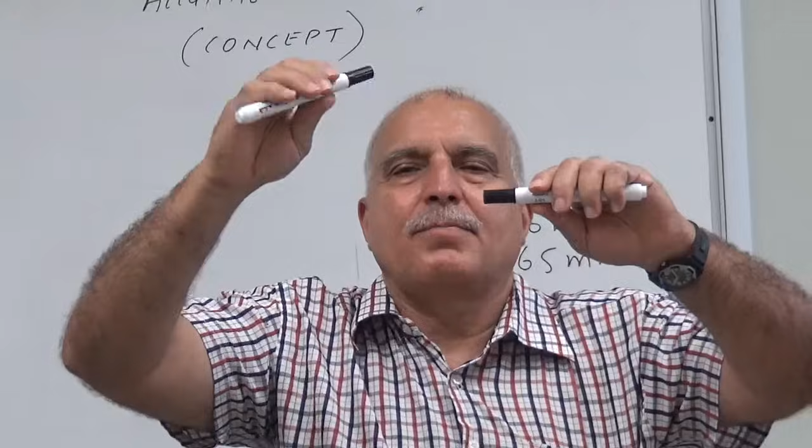For example, this is the motor, movable, this is pump, and it has got offset misalignment and angular misalignment. In this case there is offset and angular misalignment. So we have to make alignment in the vertical direction, and after that we have to make alignment in the horizontal direction. The formula which we use is the same for aligning in the vertical direction and for aligning in the horizontal direction.

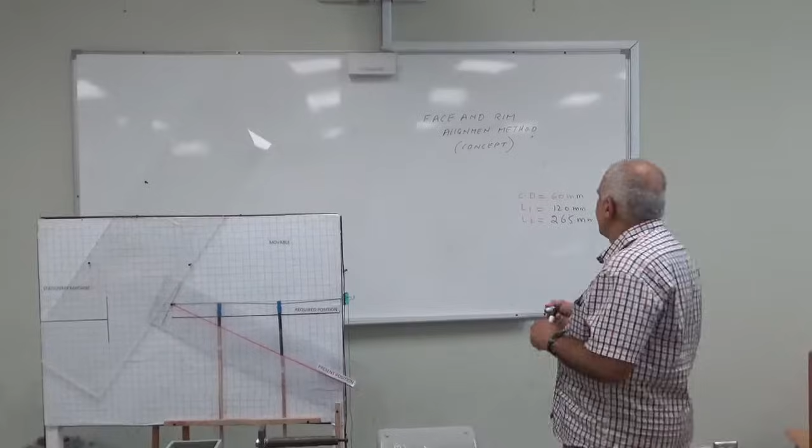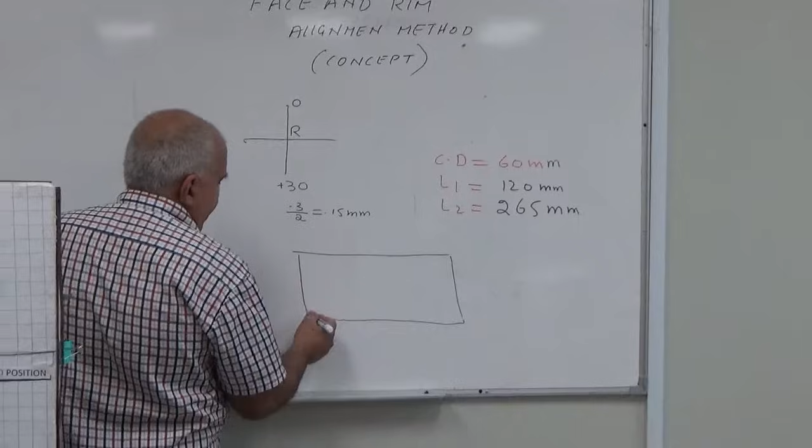The formula is the same, and as we know, for offset misalignment we divide the total reading. For example, on the top it is 0 and on the bottom it is 30 plus 30, so it means 0.3 millimeter. So 0.3 divided by 2 is equal to 0.15 millimeter. So we will add, for example, if we are aligning in the vertical direction, this is for the front side bolt, this is for the back side bolt. The shims which are to be added or removed. This is for radial, this is for angular. So for radial it will be plus 0.15 millimeter here and plus 0.15 millimeter.

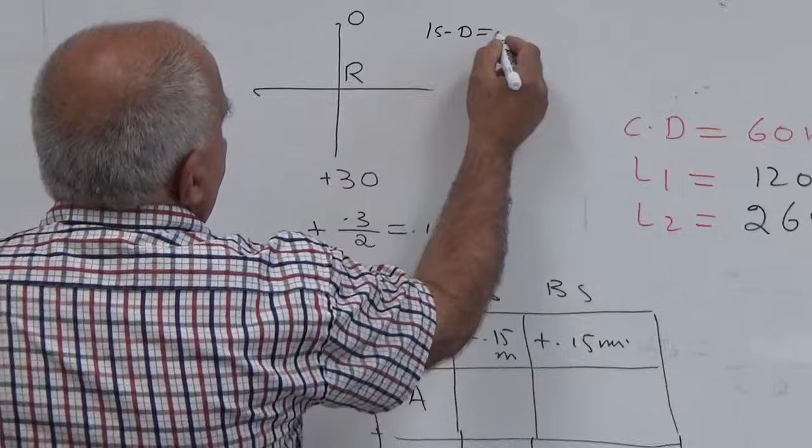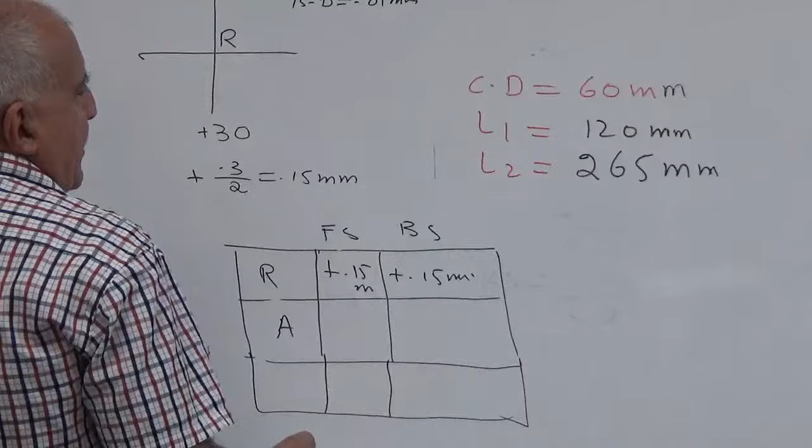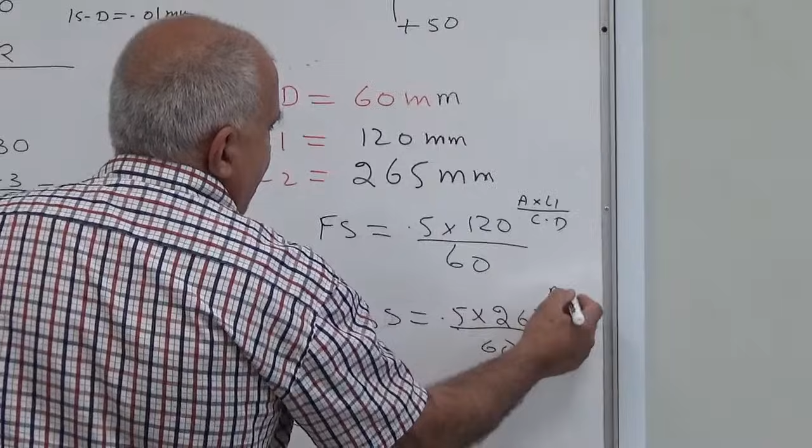This is for offset, and on your dial indicator one small division is equal to 0.01 millimeter. So since this is the dial indicator reading, it means 0.3 millimeter. For offset we will divide by 2. And for angular, as I have told you, we take 3 dimensions: coupling diameter, L1 and L2. For the forward side, for example, the angular reading is plus 50, so we will change it into millimeter, 0.5 into 120 over 60. And for the back side, it will be 0.5 into 265 divided by 60. The formula is A into L1 over coupling diameter, and here the formula is A into L2 over coupling diameter.

You know A is the angular reading, and L1 is the distance from the coupling face where you are taking the reading from the dial indicator on the face to the front side center bolt, that is L1. L2 is the distance from the coupling face where you are taking the angular reading to the center of the back side bolt.

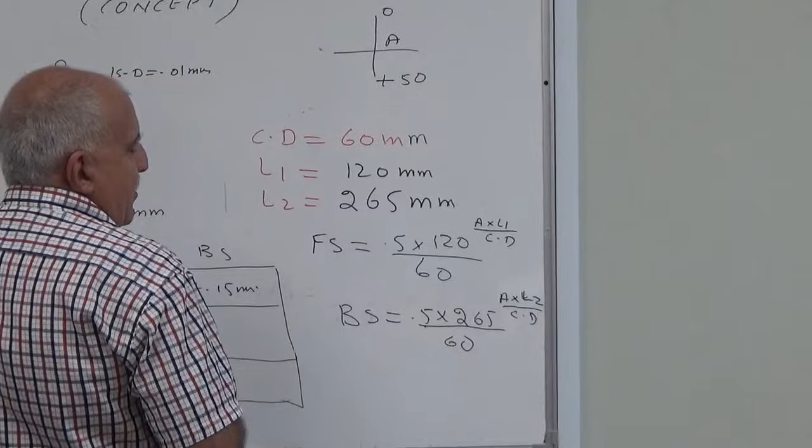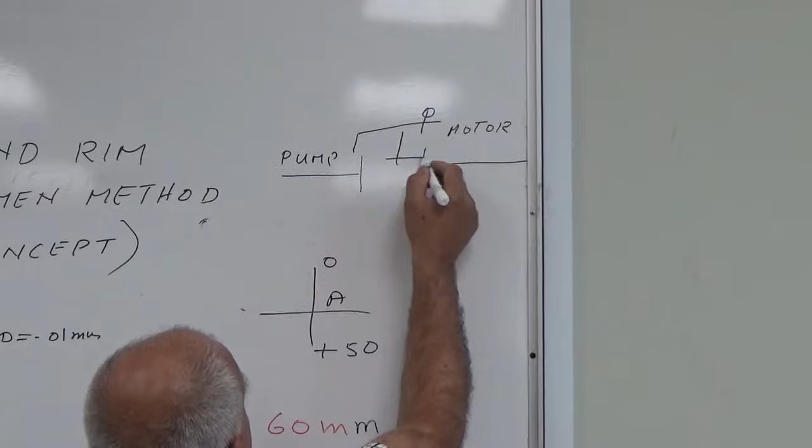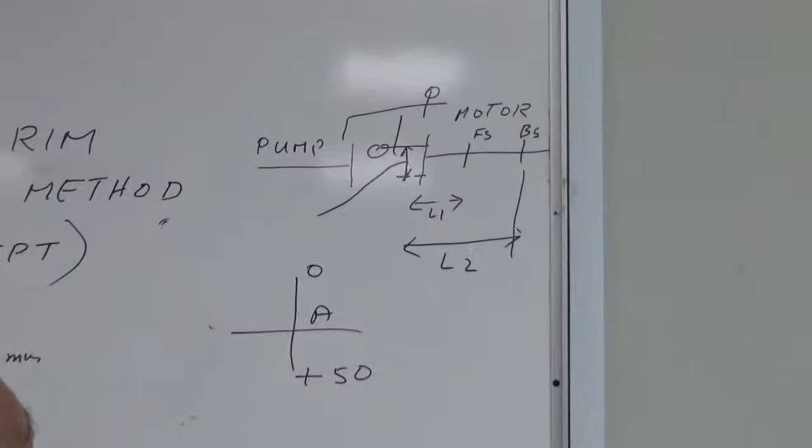So I can show you here. For example, this is the motor and this is the pump, and you are taking the reading here. This is the front bolt center and this is the back bolt center. So this will be L1 and this will be L2. And the diameter of the circle on which this dial indicator is rotating will be called the coupling diameter. It is not exactly the coupling diameter, but we will call it coupling diameter.

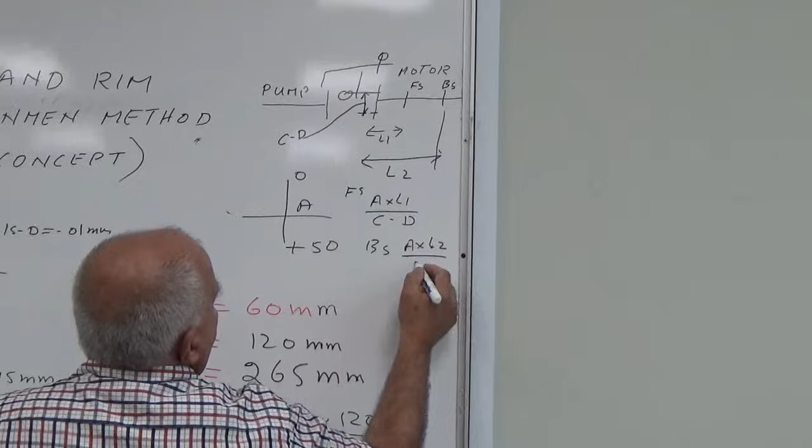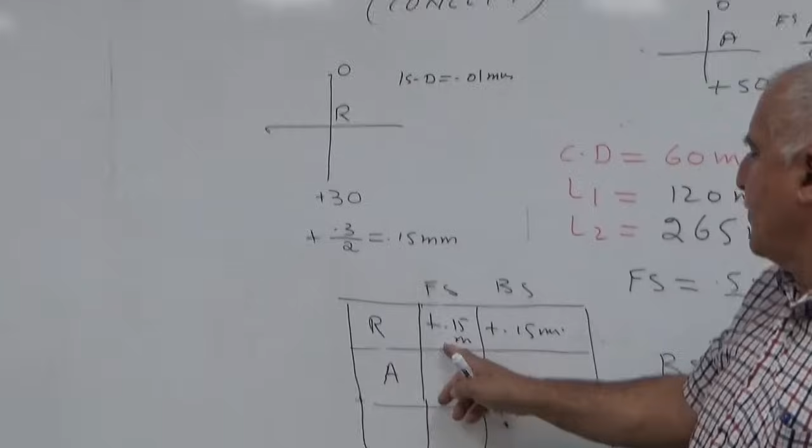And for shims on the front side, the formula is angular reading into L1 over coupling diameter, and for the back side, A into L2 over coupling diameter. So these are the shims which you will add or remove for angular alignment. These two formulas: if it is minus, you will remove; if it is plus, you will add. And this was for the offset misalignment. Whatever answer you get here, you will write on the front side and the back side. It will be the same, not different. But for angular reading, this will be different and this will be different. And then you will add the total.

Okay, now I will come to the machine and start. I have already done this alignment in the vertical direction. Now I will do alignment in the horizontal direction. When you do alignment in the vertical direction, you make soft foot correction. After that you make rough alignment, and after rough alignment you do precise alignment with the dial indicator. Now we have finished the alignment in the vertical direction. Now I will do it for the horizontal direction. Horizontal direction means this or this, like this.

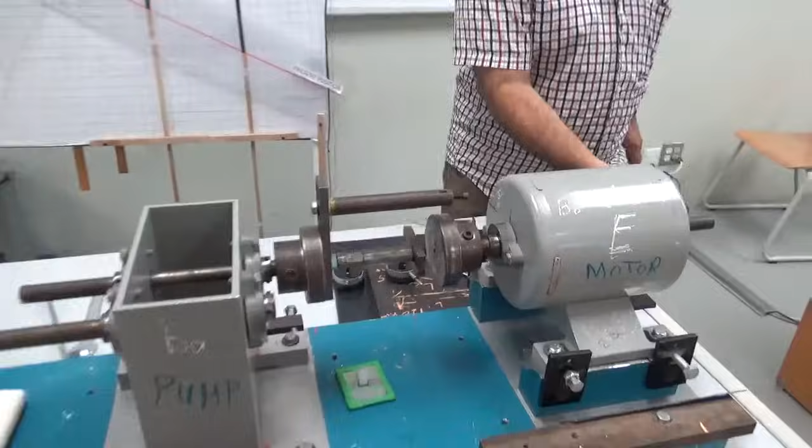Okay, I will now loosen the foundation bolts. These are the foundation bolts. I will loosen them so I can move this in the horizontal direction. I cannot move this. And these are the jacking bolts. You can see here, these are the jacking bolts. These are used to push the motor to the opposite side. These are to be used to move the motor to the opposite side only when these foundation bolts are loose. These are the forward support bolts, and these are the backward side bolts. Again you can see here, this one here.

Now what I will do, I will remove this a little away and make rough alignment in the horizontal direction. So this is, I am making alignment in the horizontal direction.

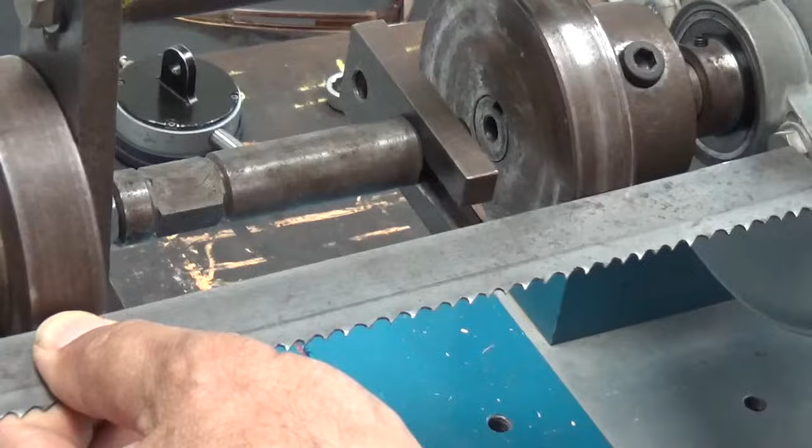Okay, so this is alignment, there is no gap here, so I will just touch these jacking bolts. Now I can move from these jacking bolts forward or back side. Now this is almost rough aligned. There is no gap here, so I will just touch the jacking bolts. These are the jacking bolts. I am touching it so that the position is not changed.

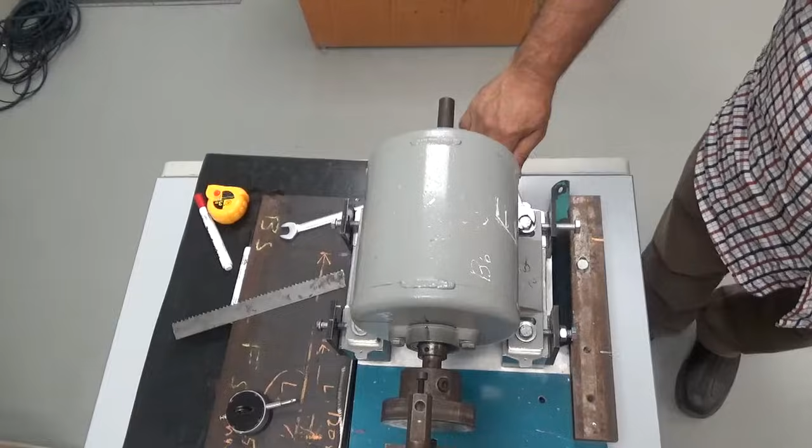Now I will tighten these motor foundation bolts, but when I tighten them, I will tighten them in 3 steps or in 3 rounds. So this is my first round. It is always a crisscross pattern. This is called the crisscross pattern of tightening. So I am tightening it now. This was my first round. Now second round. Okay. Now third round. Okay.

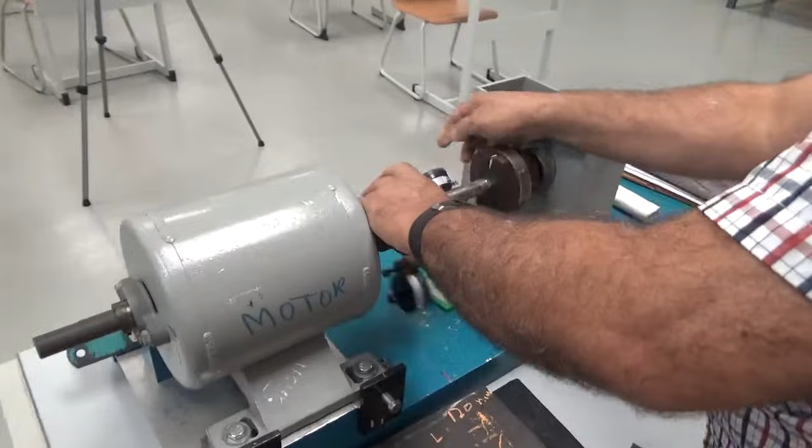Okay, now I will take the reading. I will fix this, this is fixed on the rim side, and this is fixed on the angular side. Okay, so after this I will take dimensions L1, L2 and coupling diameter. I will start with the coupling diameter. Coupling diameter, L1 and L2 are necessary for angular alignment, and the reading which I take on the rim side is for offset alignment correction.

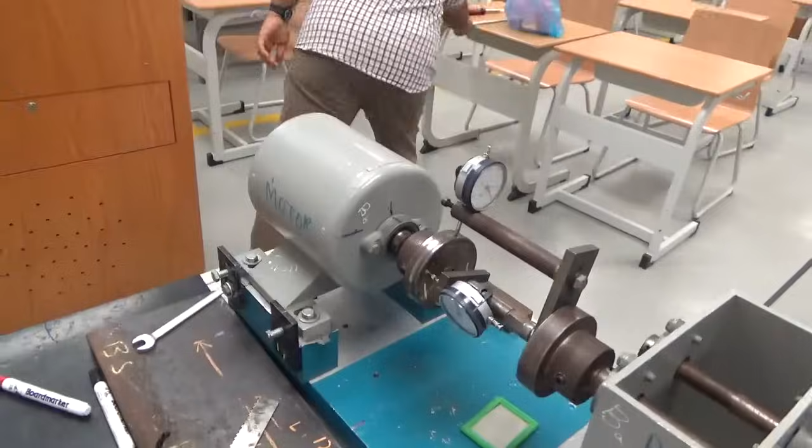Now I will take the coupling diameter. This needle is touching here, I will make a mark here. Okay, this needle mark here. Now I will come to the opposite side and make a mark here. So these are the two marks, and now I will take the measurement here. It is about 60 millimeter. So coupling diameter I have already written, 60 millimeter.

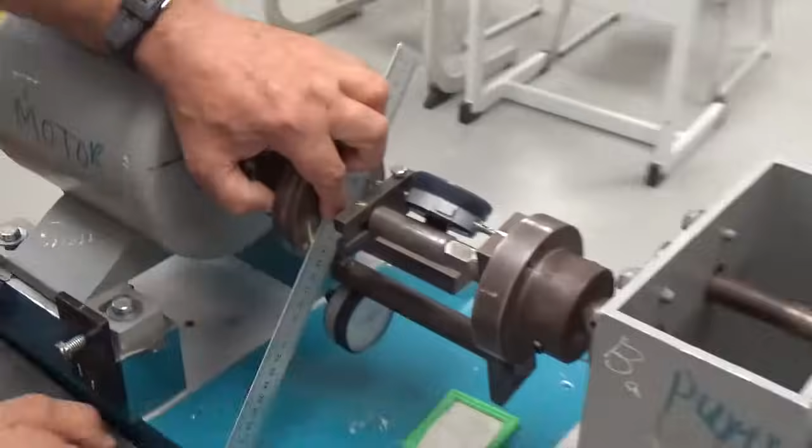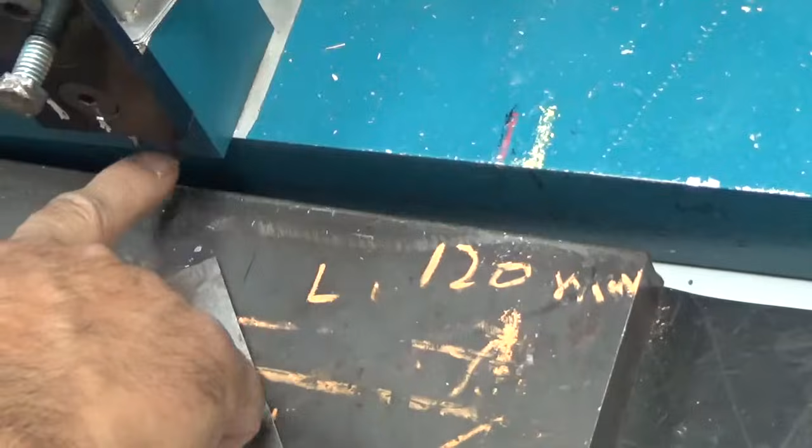After this I will take the measurement from this face to the center of the front side bolt, from here to here. I will make a mark here. From here to here, this one is about 100. You can take the reading and it can be different at different times. Now from here to here it is 120 millimeter, and from here to the center of this bolt is about 265. L1 was 120 millimeter, and L2 is 265 millimeter. Okay, this I have already written here.

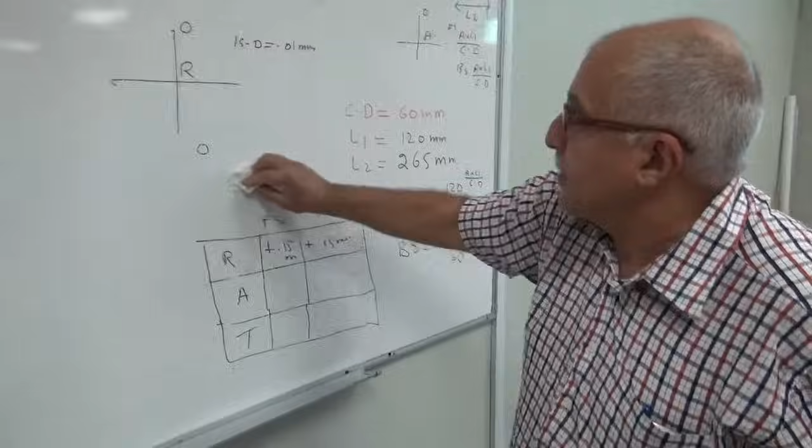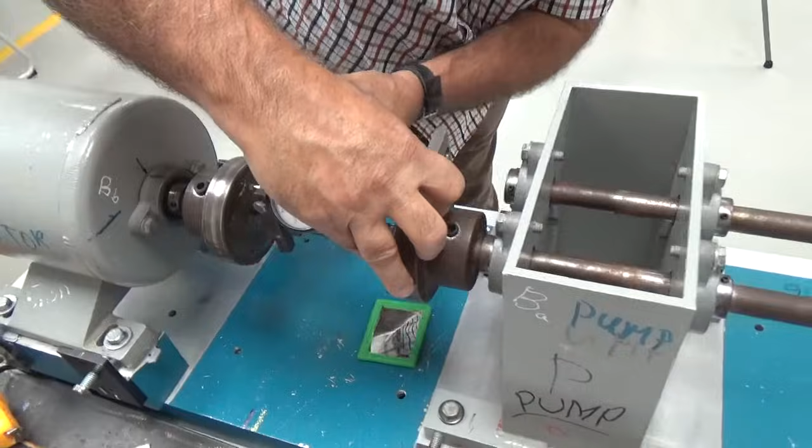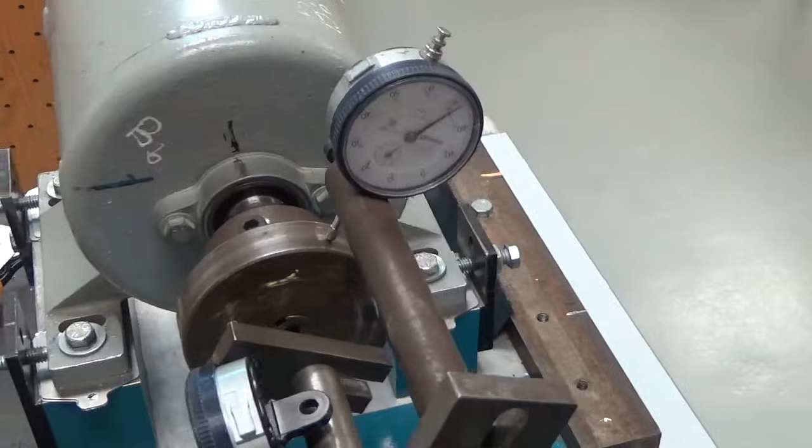Okay, after this, now I will take the readings. I will start from this. I will take the rim reading and I will make it 0 here. This is 0 here, and I will go to the opposite side and take the reading. This is 100, 200, 300, and it is 322. I will recheck it. Okay, here it is 0. So I go to the opposite side. This is 100, 200, 300, 322 plus 322 dial indicator reading. So I will write it here. Dial indicator reading here is plus 322.

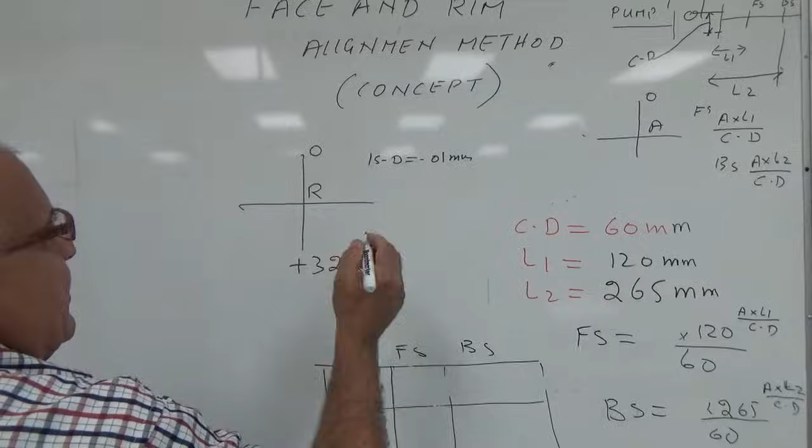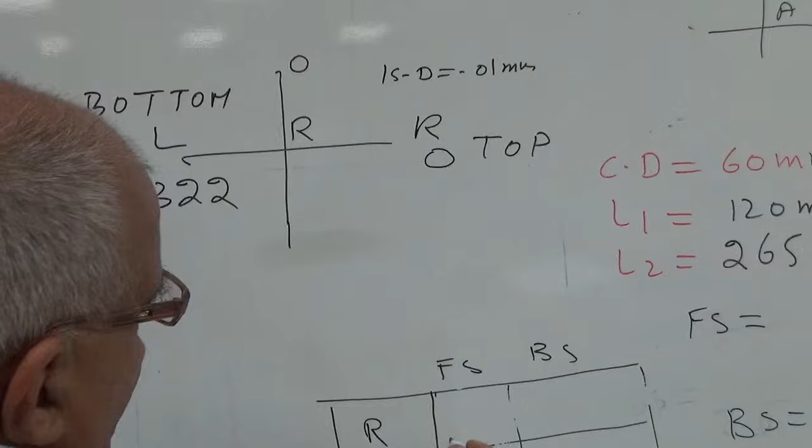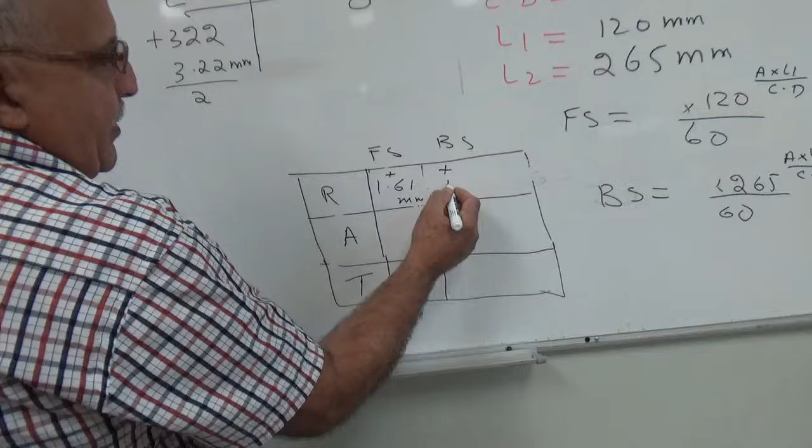I can write here also, this is left side, this is right side, because this is horizontal. So this side is 0, and this side is plus 322, because I am doing it on the horizontal side. So this is top and this is bottom, but it is in the horizontal direction. So 322 I will divide by 2. This becomes 3.22 millimeter, because one small division is equal to 0.01 millimeter. Then I will divide this by 2. So this will become plus 1.61 millimeter. Okay, so 1.61 millimeter is for the front side in the horizontal direction.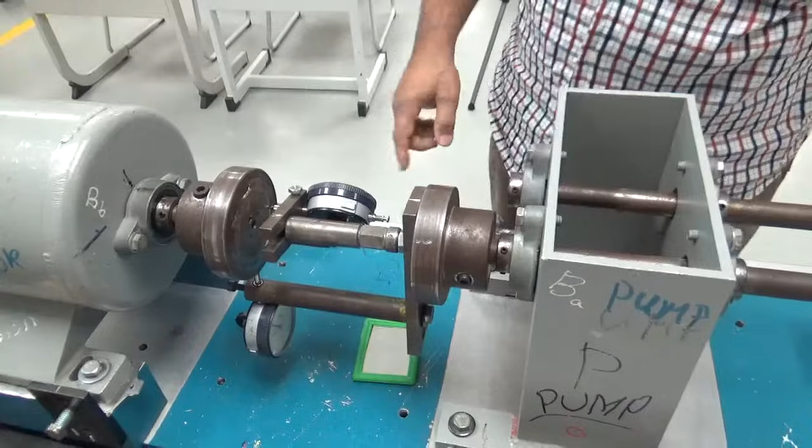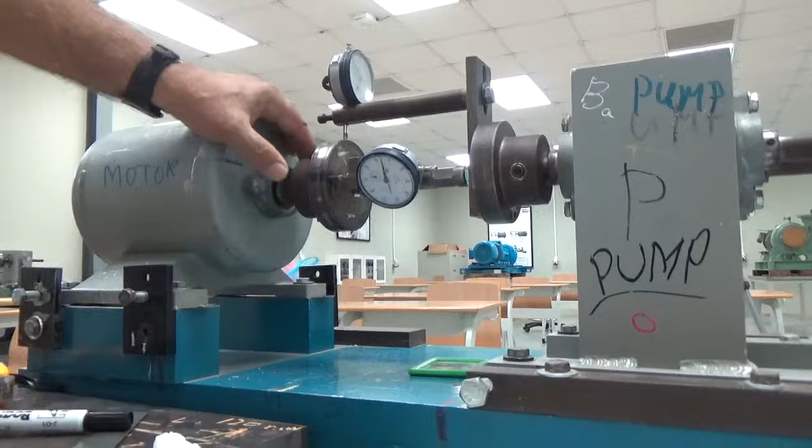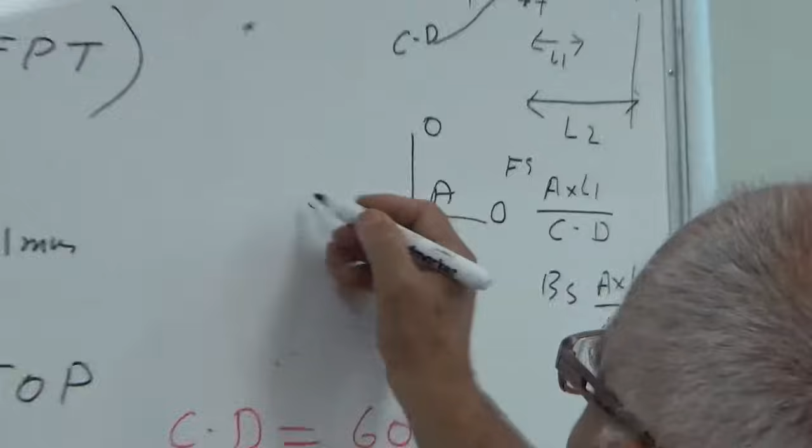Now I will take the reading for angular. Okay, this is 0 here. This side you can see here, this one is 0. Now I will go to the opposite side and see what is the reading there. The reading here is minus 5. So the angular reading is minus 5. I check it again. So it is almost minus 5 or minus 6. Okay. So I will write here, angular reading is minus 5.

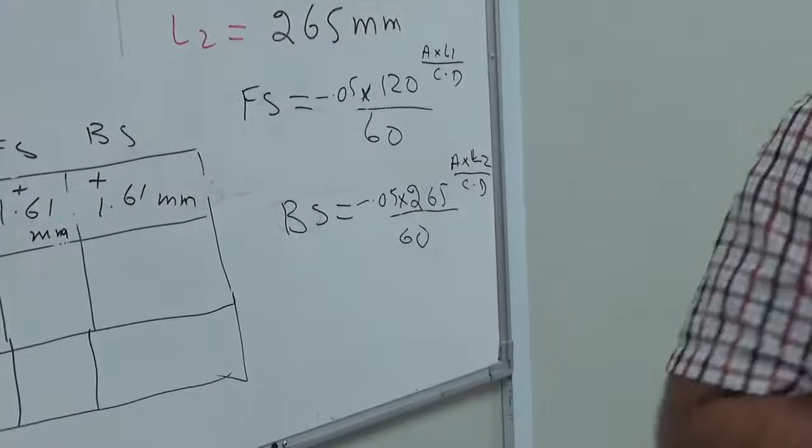Now I will measure the angular alignment correction for front side and for back side. So this will become minus 0.05 millimeter. So minus 0.05 here and minus 0.05 here on the back side. So these shims will be the correction for angular alignment for front side and back side. So what is the answer? 0.05 into 120 divided by 60. Since it is minus, this is minus 0.1 millimeter. So I will write here minus 0.1 millimeter.

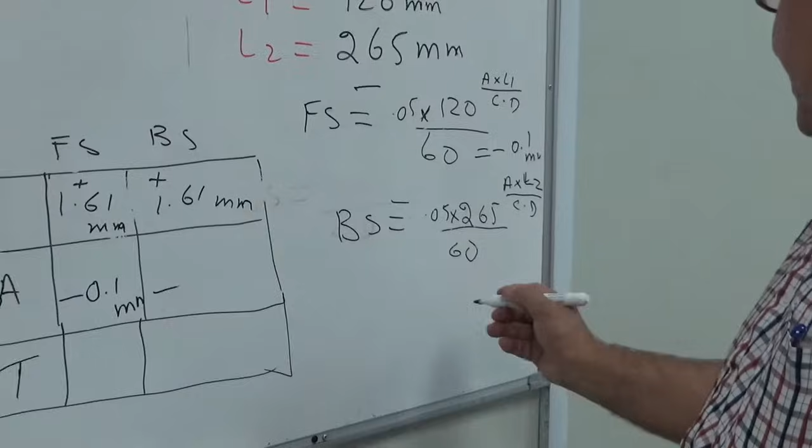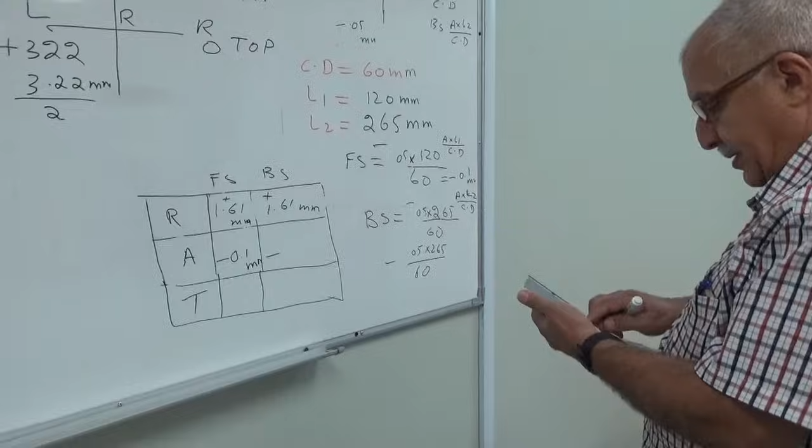And what will be this? This is minus 0.05 into 265 over 60. Minus 0.05 into 265 divided by 60 is equal to minus 0.22 millimeter. So here it is minus 0.22 millimeter. Now the total will be 1.51 millimeter plus for the front side, and for the back side plus 1.

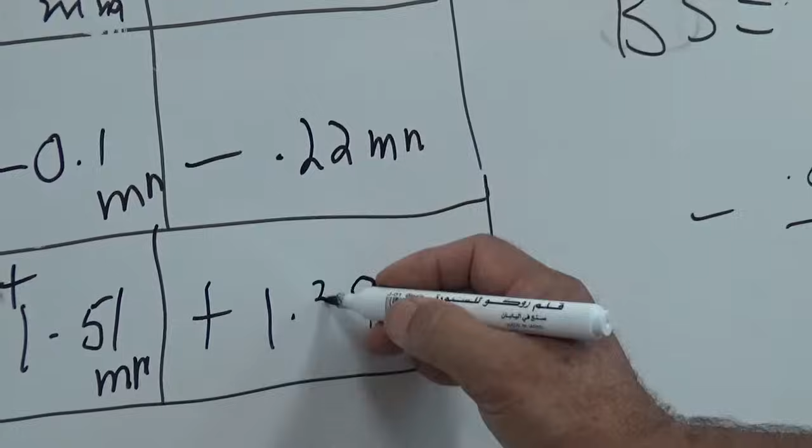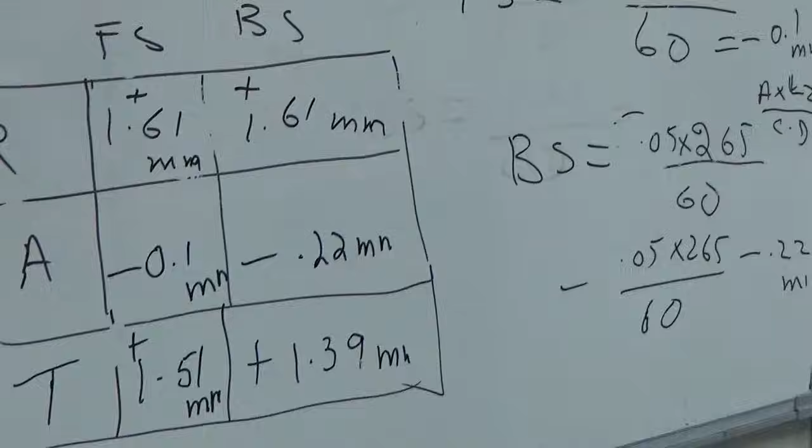So 1.39 millimeter for the back side. Okay, so these are the shims which I have to add on the front side and on the back side. 1.51 for the front side and 1.39 on the back side. It is in plus, which means that now right side was 0.

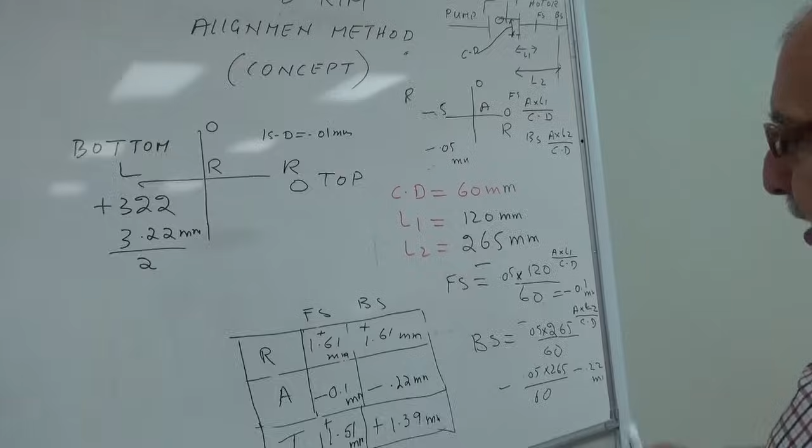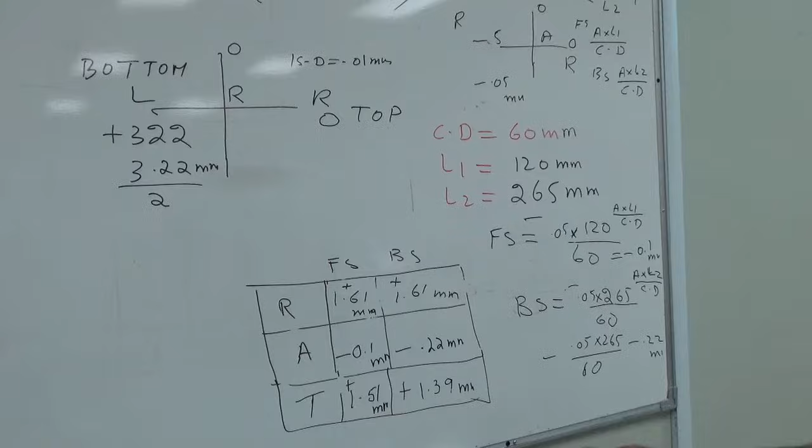This was our top, this was our bottom. So from the bottom we have to add, as per vertical alignment procedure, when we get plus reading in the bottom, we have to add the shims. But here we don't have to add the shims. We have to push from the right side. This is the right side and this is left side.

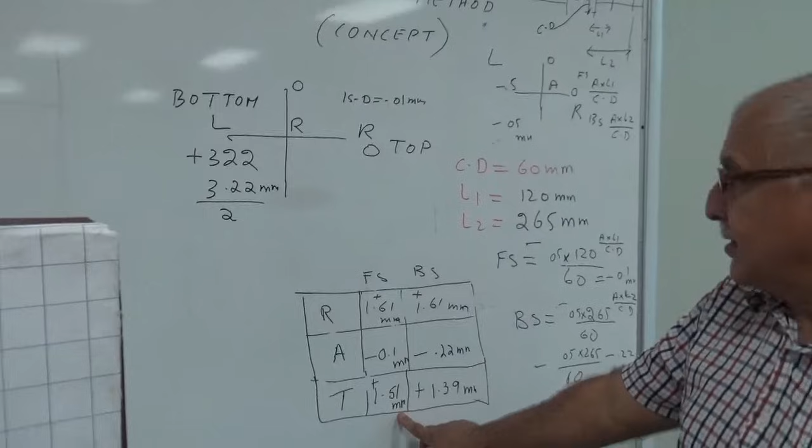So we will push from the left side to the right side, because this is 0, and here we are getting plus answer, plus 1.51 and plus 1.39. So from the front side, we will push 1.51 millimeter from left to right, and same is here at back side. From the center of back side, we will push from left side to right side. How much? 1.39 millimeter.

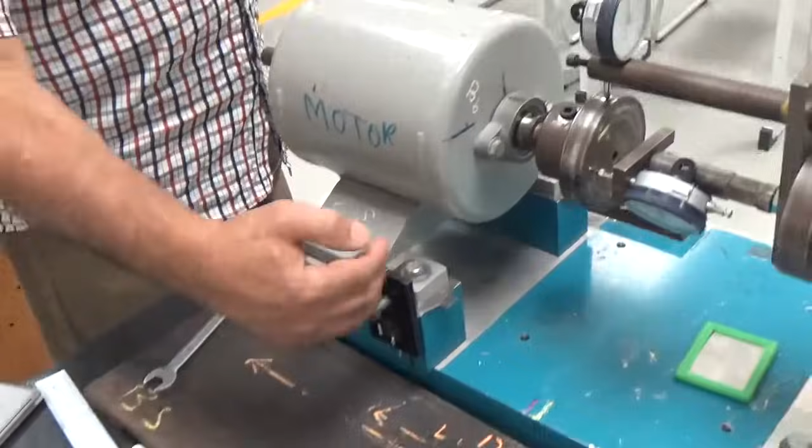Okay, now let us do it. How we can do it? First we will make sure that these jacking bolts are touching the motor foundation bolt. Okay, after this, we will make a gap on the right side, because we have to push. This was 0 here and this is our bottom, and we are getting plus. We have to push it from this side. 1.51 millimeter we have to push from this side, and 1.39 millimeter we have to push from the back side.

Okay, so we will make a gap, because we are going to push from front side and back side. There should be gap on the opposite side. So on the back side, the gap should be 1.39 millimeter. Okay, so we will make a gap here on the back side, 1.39 millimeter. Here the gap is 1.39 millimeter, and on the front side the gap should be

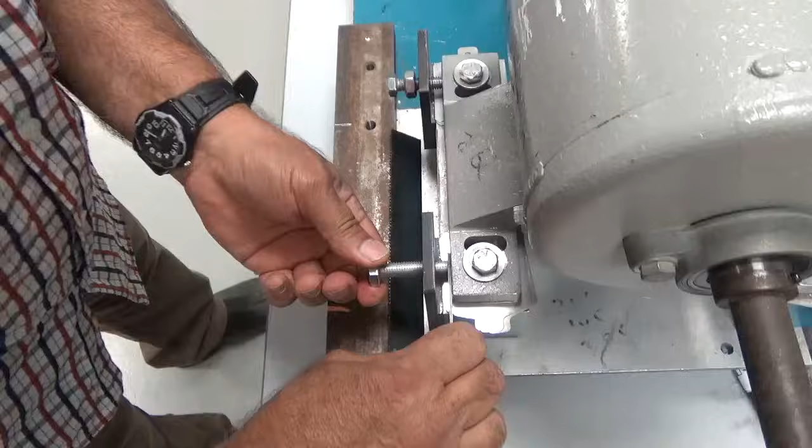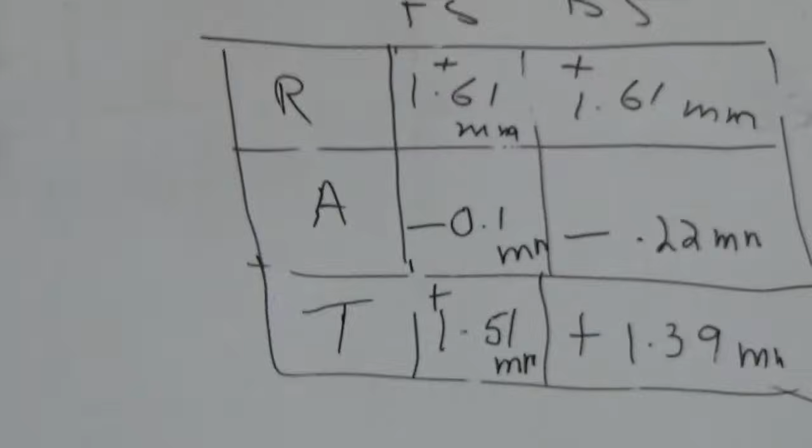Okay, again I will check it. This should be 1.39. I'm sorry, this is more. Again I will. Okay, this is 1.39 millimeter on the back side, and on the front side it is 1.51 millimeter. So you can see there in the chart, front side you have to push 1.51 millimeter, and back side you have to push 1.39 millimeter.

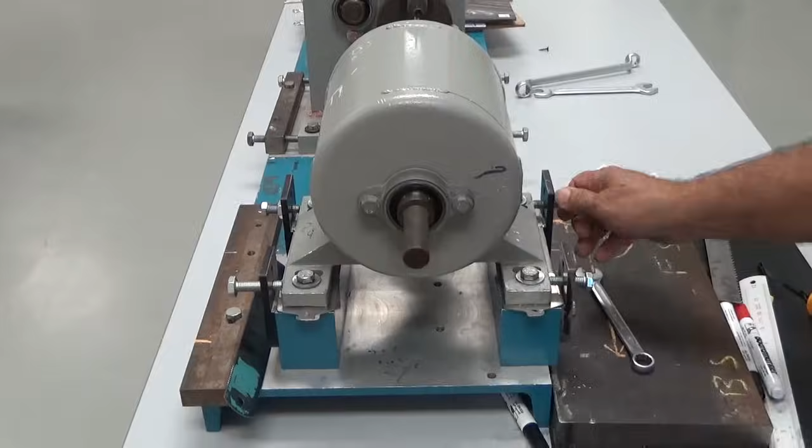Okay, after this what I will do is that I will loosen these bolts, because I have to push it, so this should be loose. Okay, so these are loose, and now I will push from the left side. Okay, I have already pushed it. Now I will take the reading.

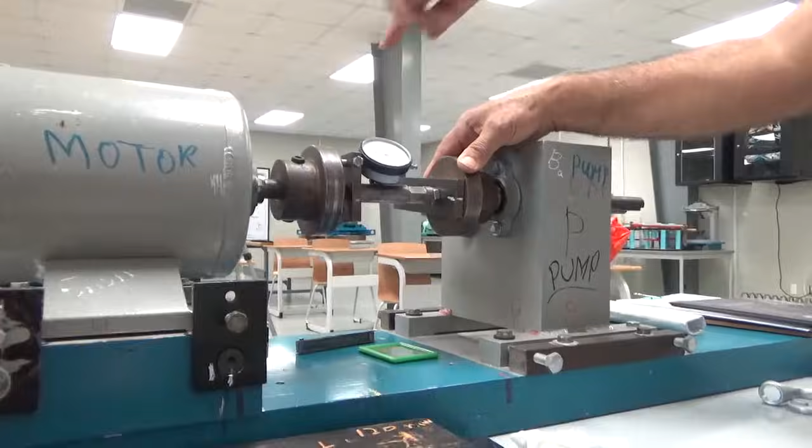Okay, now you can see here there is no gap on this side, and I just pushed these jack bolts by hand because this is a small motor. Now I will just make this a little tight, and then I will take the reading. If the readings are okay, then I will tighten them fully. Okay, so let us now check the reading. This is 0 here, this reading is 0 again here.

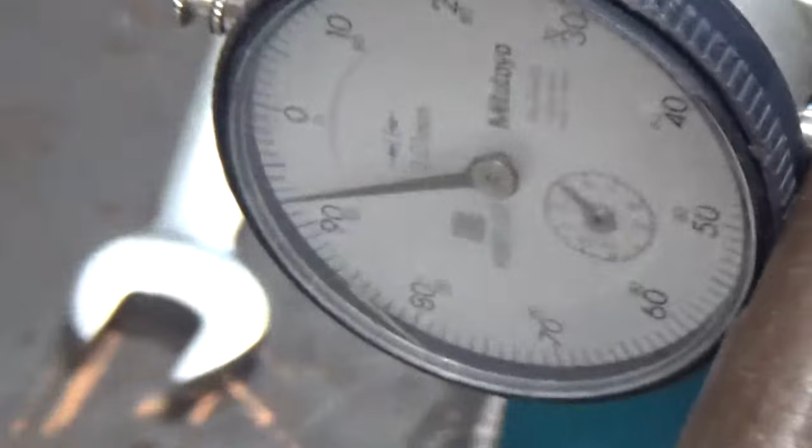And I will come to here. This is minus 100, minus 200, and minus 208. So actually you can see here why our reading is coming wrong, because we have not tightened it here fully. There is a gap here. There is a gap here. So you should be very careful. We will again make sure that we push the motor correctly. You can see here, that's why our result is not coming good.

You can see here, there is a gap here. Now I have tightened it fully. Okay, so I will now tighten it again, because my reading was not coming good. So we have to be very careful. We have to check if we have pushed the motor to the required position or not. Now I will take the reading again after this. So I am tightening it again, then I will tighten it fully next time.

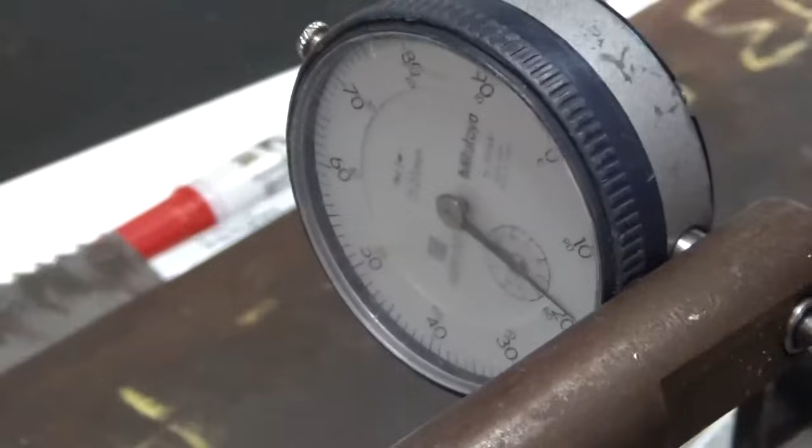After I know my readings are okay, I will take it now 0 here, and I will come to the opposite side, and now I am getting here the reading plus 80. Again I come to this position, this is 0, and I go to the opposite side, and my reading is plus 80. So I will write this new reading now. It's better than before, but still it is not okay. So I will write here plus 80, and now you will see what is the angular reading. Okay, so angular reading, I will make it 0 again, and I will come to the opposite side.

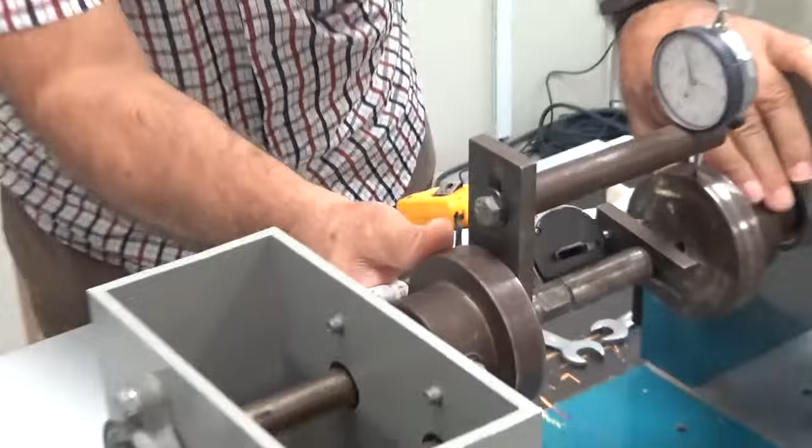The opposite side, the reading is 0. So I don't need to make correction for the angular. The angular reading is okay. Only the radial reading. How do you take the angular reading? Can you show us again? Because these are both almost 0. Yes, okay, you want to see it again? See here, this is 0.

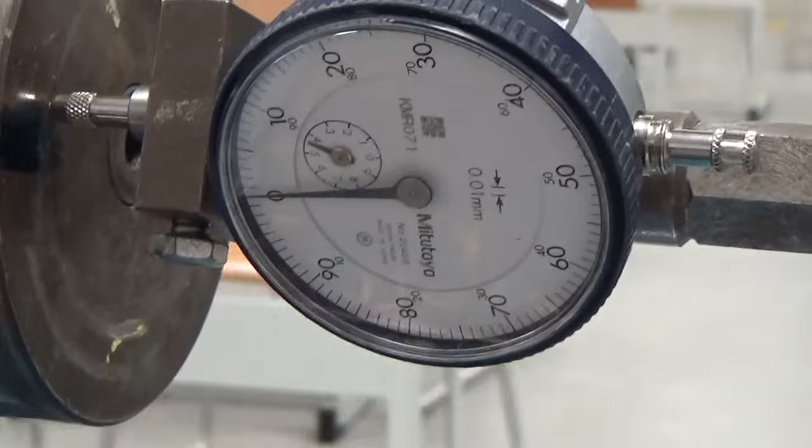Okay, I will make it 0 if it is almost 0. Now I will come to the opposite side. You can see here, come from this side, and you can see here, it is almost 0. Okay, so we have got plus 80 only here. So plus 80 means divide by 2, plus 40 or 0.4 millimeter. So this is plus 0.4 millimeter.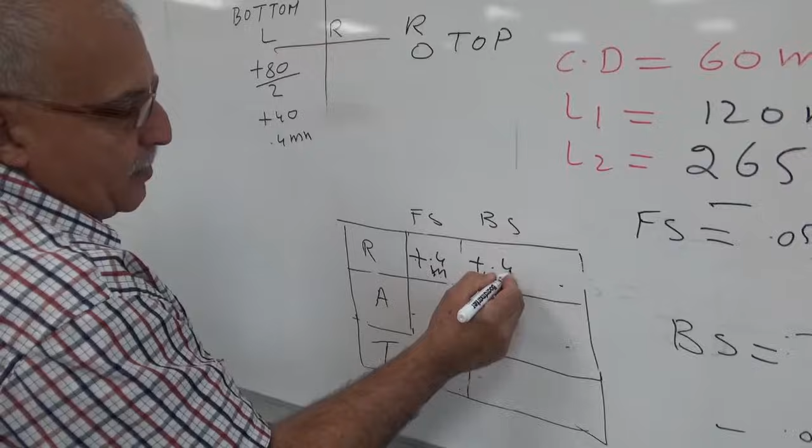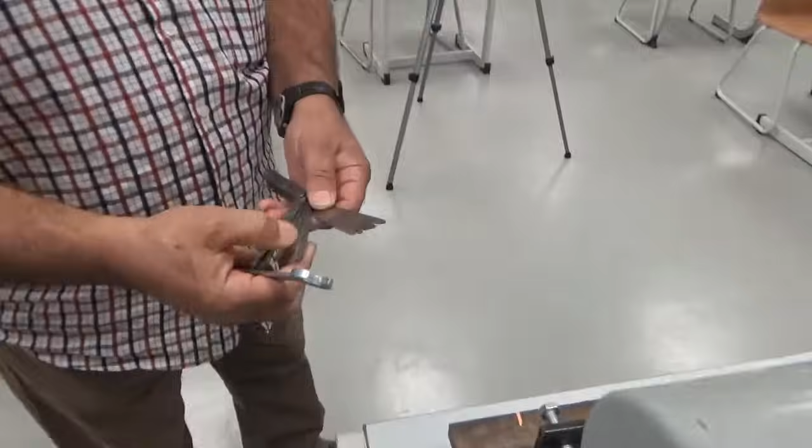Because our angular reading is 0, the answer will be 0. No need to add on the front side or back side. This is 0, this is 0, so plus 0.4 millimeter, plus 0.4 millimeter. Okay, now what I will do is I will just make a gap here, 0.4 millimeter here. This is 0.4 millimeter here and 0.4 millimeter here.

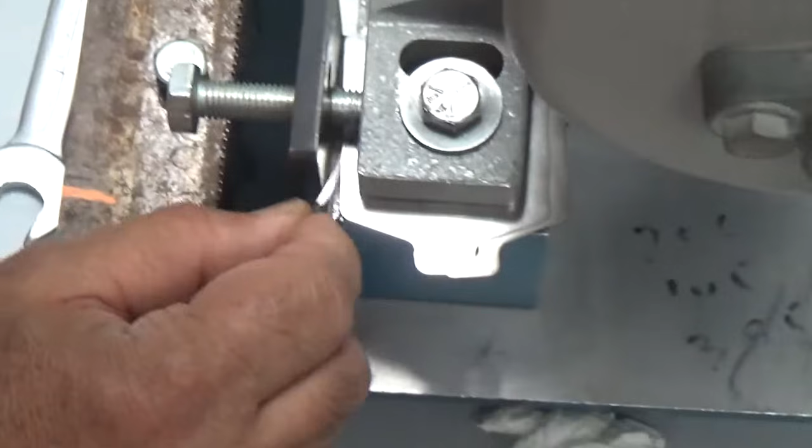Okay, after this I will loosen these bolts so that I can push it. Now I have loosened them all, and I can push it from these jacking bolts. You see? Okay, we should check here that there is no gap, because last time when we pushed it, it was not fully pushed. It should be pushed slowly, because if you push a little harder, the reading will again be incorrect. It will move more than required.

Okay, now it's okay. So I will now tighten it and I will check the reading again. Let us take the rim reading. I will make it 0 here. Okay, this is 0 here, and I go to the opposite side. Again, my reading is not coming correct. It was 0. It is coming a little off. Let me check it again.

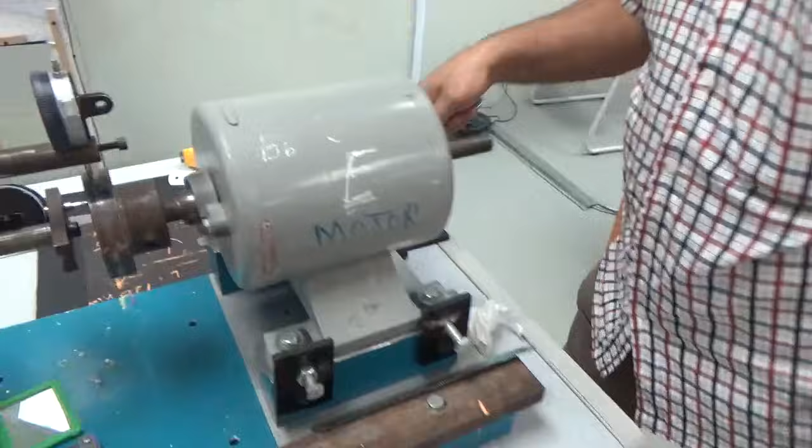Okay, the reading is not coming correct for some reason. Some mistake has been made, so we will repeat the process again. Let us start the process again. We will take the rim reading again, and this time we should be careful. You can see here, because this is a small pump, you have to do it many times. Now this is 0 here. I come again here. This is now minus 100, and this is now minus 200, almost minus 200.

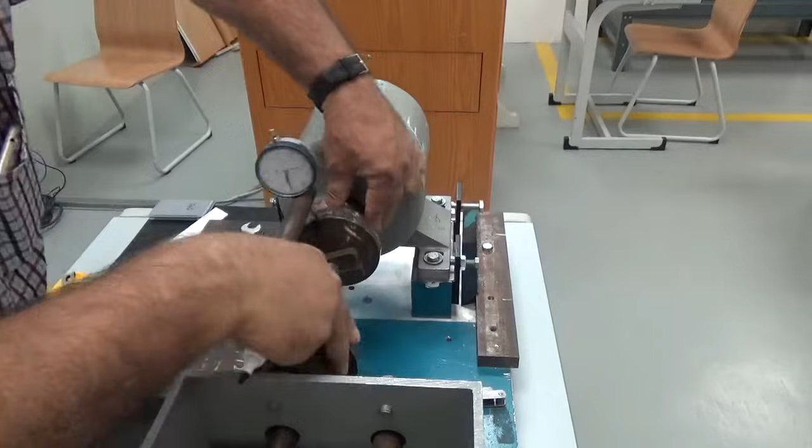Okay, so this radial reading here is minus 200. So again I check it, to be very careful. 0, minus 100, and now it is coming minus 185. So I repeat it a third time. This is 0. This is minus 100, minus 100 and 80, minus 182. Okay, so I will write minus 182 here, and let me check the angular reading.

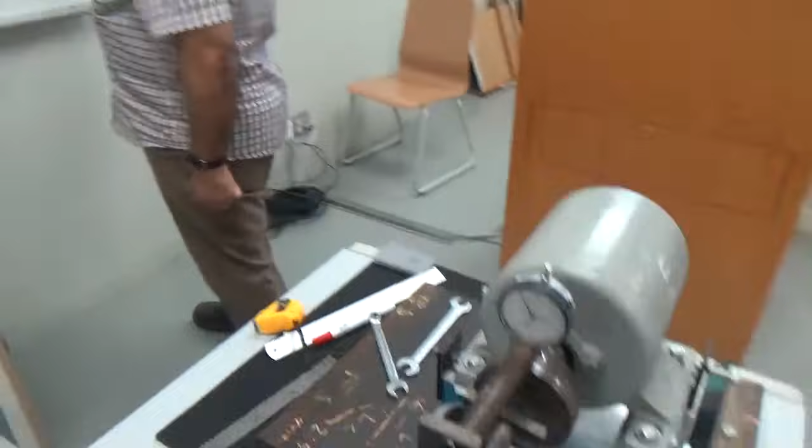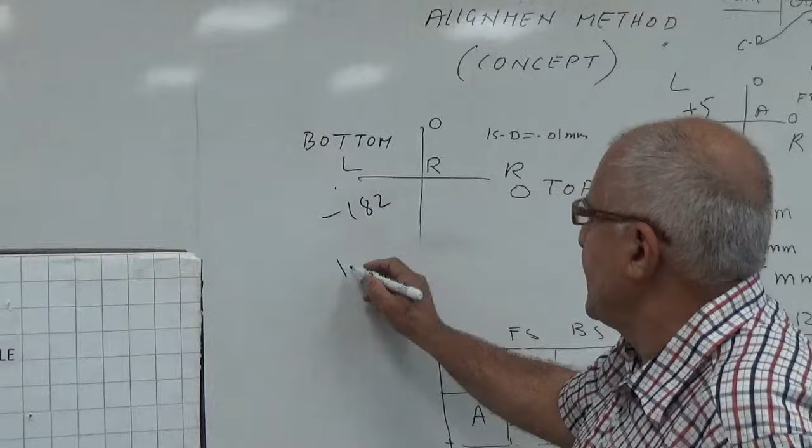Angular reading is 0 here, and I go to the opposite side. The opposite side, the reading is plus 5. So this is plus 5 here. Okay, now I calculate here. Let us see what this reading is. Minus 182 divided by 2 and then multiplied by 0.01. So 1.82 divided by 2, this is minus 0.91 millimeter. This is minus 0.91 millimeter.

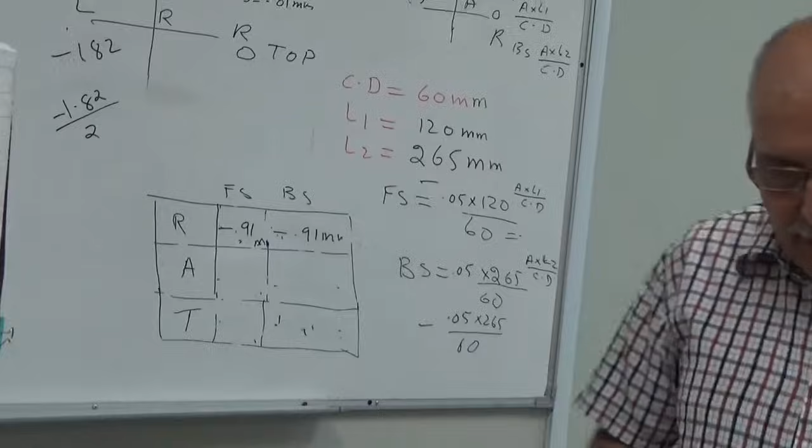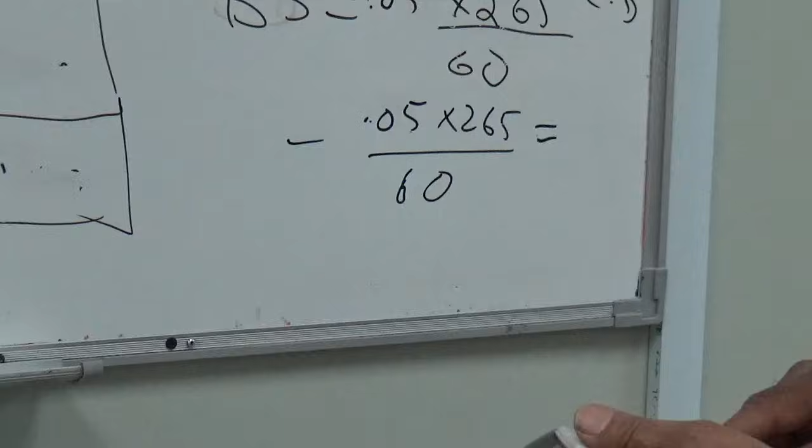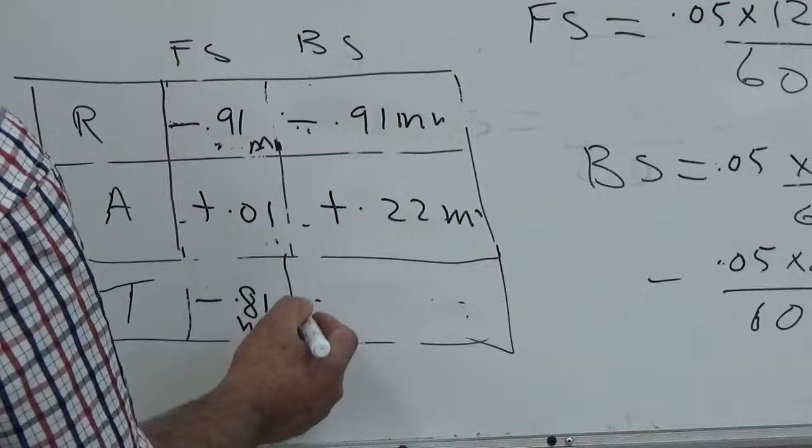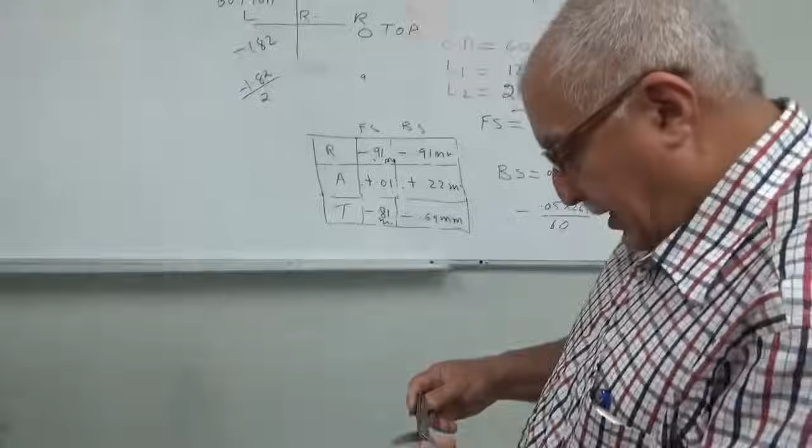Okay, so let us now do it. Because my results are not so good, I will fix a clamp here, and I will also monitor with the help of a dial indicator on this side. I will use two methods now. For the back side the gap should be 0.69 millimeter. So I will make a gap of 0.7 millimeter, and on the front side the gap is 0.81 millimeter. So I will make a gap here of 0.8 millimeter.

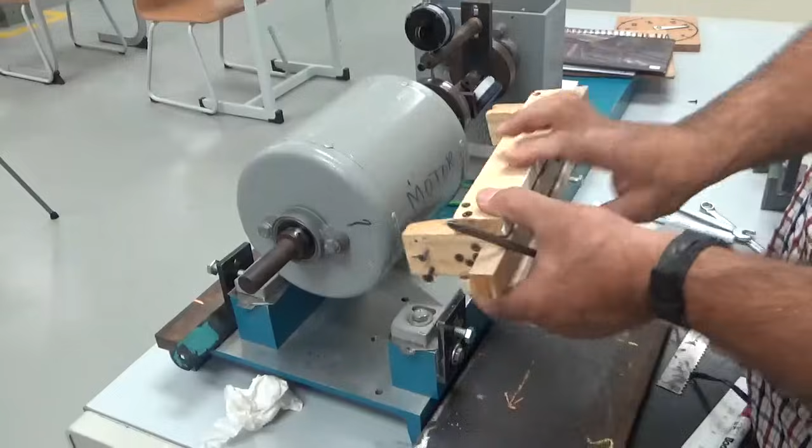I will now fix this clamp also, so that from this clamp I can fix the dial indicators and monitor the movement, because I am not getting so good a result. Although the procedure which I have used is okay, there is no problem with the procedure. So this was over here, and we will fix this.